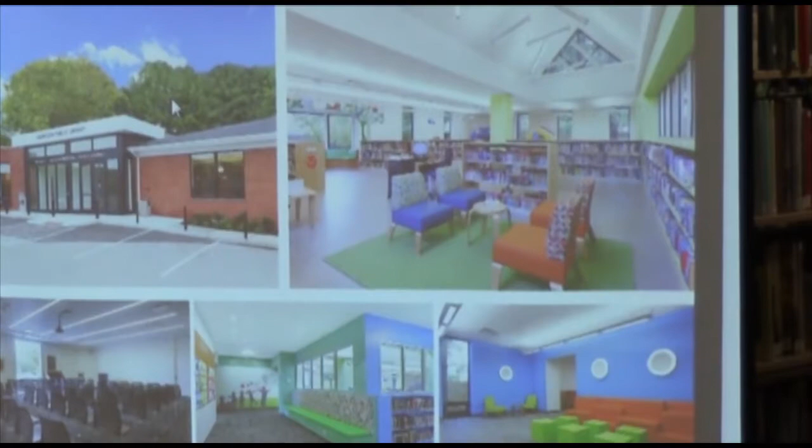We've also modernized and created connections from older buildings to newer buildings, both at the West Point campus, at the city of New Haven next to Yale, and we're also doing two Carnegie libraries in the borough of Brooklyn in New York.

At Vassar, the Ingram Library, which is the addition on the right, connected two wings of the main academic library to create a new focal point and entrance. And we combined both the old and the new to provide a purpose-built facility for library study at Vassar.

And lastly, we've done quite a few civic libraries around the nation. We've done work at the Portland Multnomah County Library, the Cleveland Public Library, the Los Angeles Central Library, that renovation back in the late 80s. This is a project we did in Savannah, Georgia.

All of these projects have received awards from the national organizations, the American Library Association and the American Institute of Architects. We understand how important these libraries are to the culture and the fabric of the community. We want to make sure that anything we do here in South Orange has lasting value in a civic sense for the entire community.

So let me mention a couple of notes about your existing buildings here. The current library here, as we all know, is in the 1968 building, which was a little scary when I thought about it, because that's when I was born. Now, people, we improve with character and age, I think. Sometimes buildings get a little worn and tired, and they do need rejuvenation and maintenance. The 68 building has served you quite well in this amount of time.

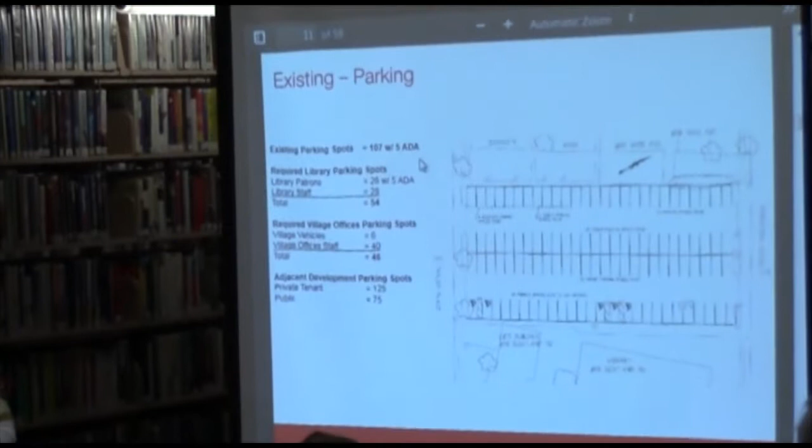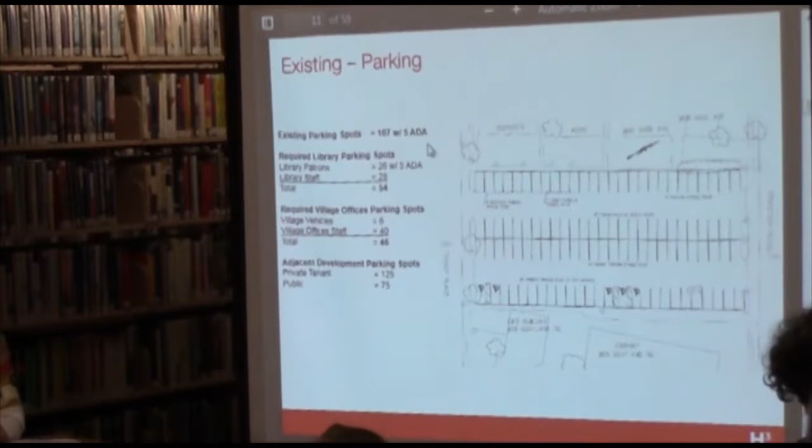Let alone all the cars that were coming in, trying to get in either on Comstock or Taylor. And I already know, it was one of the very first things early on, the traffic coming on Scotland, the speeds of people coming down that county road, trying to get all these cars into this space is a very difficult thing. So the parking issue was one of the key drivers as to really considering reducing the program to just the library.

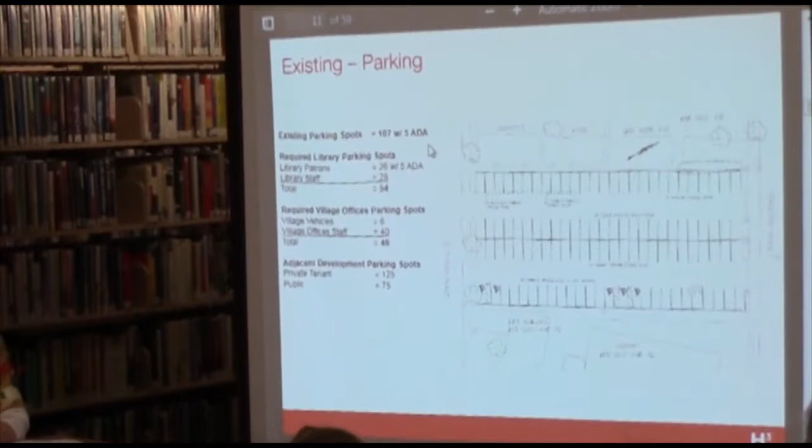So the next issue was, how do we connect the Connect with the 1968 building. The Connect, obviously being empty now with that tenant leaving, owned by the village, is a perfect way to retie back into the history of the neighborhood, the Montrose Park Historic District, as well as a space that could be used for library purposes. Derry will get into why we think the square footage of the Connect, if it were connected to the 1968 building, seemed to be the most logical and sort of a win-win in terms of trying to put together a plan.

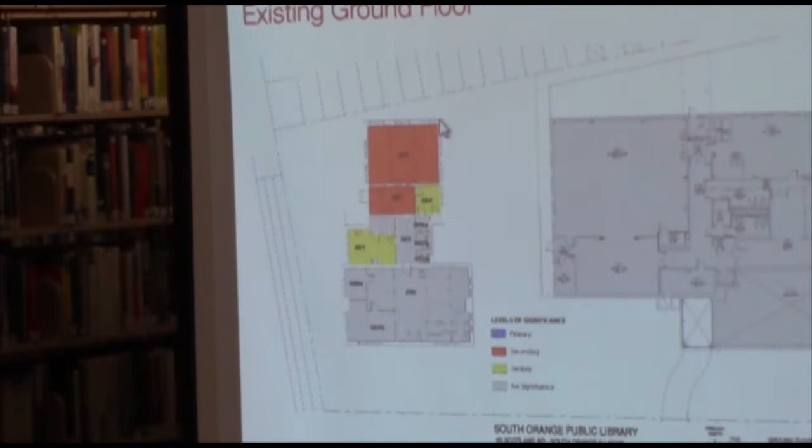So let me just go through quickly the existing plans in the building, if I can see if this works. So we have here the Connett building. Here's Scotland Road on the bottom. Here's the parking lot on the top. Here's the building that we're in, and we're looking at right now the lower level. So this is the level right now. You come in from the parking lot to the back. Here's the children's space. Here's the meeting room that's downstairs. And then there is library back of house facilities in the northwest corner, or northeast corner.

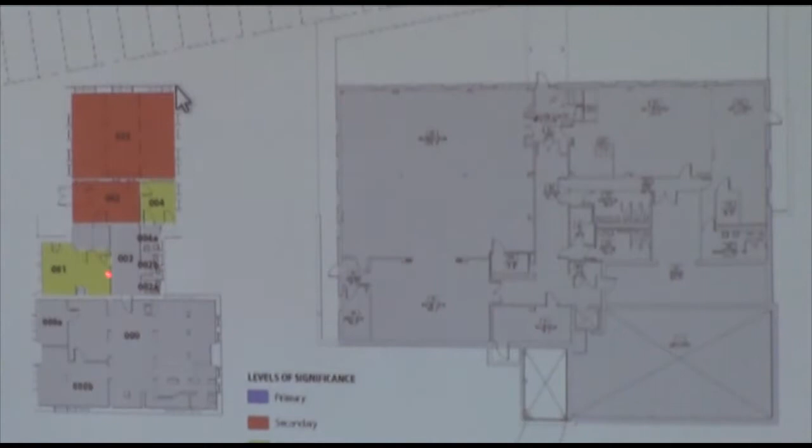In the Connett building, they're mostly in the front, underneath. This is below grade. Scotland is here, it's a level up. This is all below grade. This used to be the cellar, the boiler rooms, and a lot of mechanical spaces for the Connett building. And there are a couple of spaces back here that could be repurposed for office space as well as back of house library space. Can we go next?

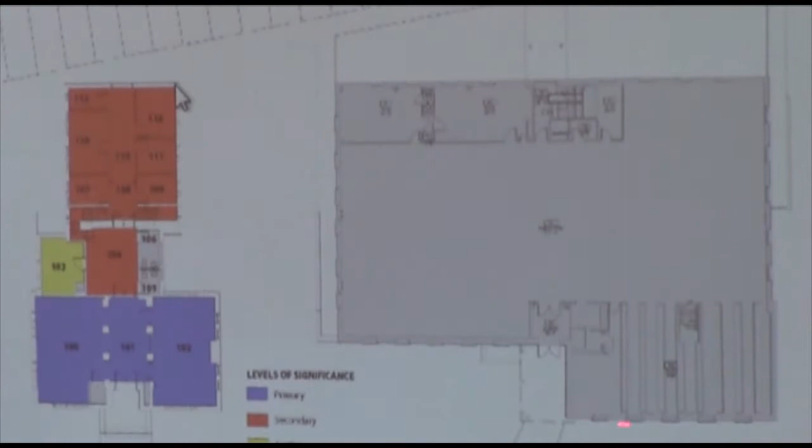It has ceilings that are around 7 feet tall. I'm not really sure why anyone wanted to do that, and there's really this weird 1970s basement wall paneling all over the place. But if you clean that all up, this would make a fantastic meeting room in the back because it has the height, it has the space for it. We're sitting right here in this corner. And Melissa's office, library offices here, and the big open room that we're in right now, and then the stacks here. Go to the next.

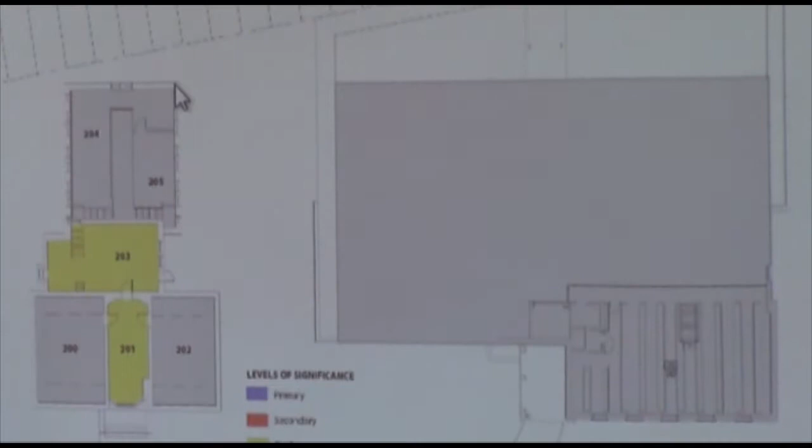And then in the 1968 building, the sort of mezzanine level, which is up here, is the only other portion of this building that has access to an upper level. In the Connett building, most of these are attic spaces, so they have the big triangular roof areas. These used to have these beautiful lay lights or skylights that would bring light down into the reading rooms below. And there's some strange kind of attic spaces here that you could repurpose as offices, but unfortunately there is no elevator access there. You would have to get a lift or handicapped accessibility up to those levels in order to make them accessible. So that's sort of the general lay of the land.

I'm going to hand it over now to Darian to talk through the big picture.

So it's really delightful actually to be in this room because this verifies and reinforces all the great qualities about your library. And I've done a lot of library design in my career, but just being able to sit here and see the flexibility of the space, you don't really appreciate this when I'm having conversations with Melissa. Oh, I just clear all the tables away and put chairs in, and that's where we do our big programming. To actually see this, working with this is great. And also, too, to sit here and have this vantage point and know that from the circulation desk, you can see, you have visual control over the entire library space. So you have many, many qualities in your library that many people hope to design into their new libraries.

So we hope to replicate all these, but we hope to actually make it better. Because it is a little, just looking around at the finishes and some of the furniture, it could be updated, it could be made to be a lot better.

And also the expansion would help you make a connection between the Connett building and this building. When we did the evaluation, we'd been brainstorming about this for over a year. We wanted to see how to update the Connett building, to join them into this wonderful assembly of spaces with the Link building.

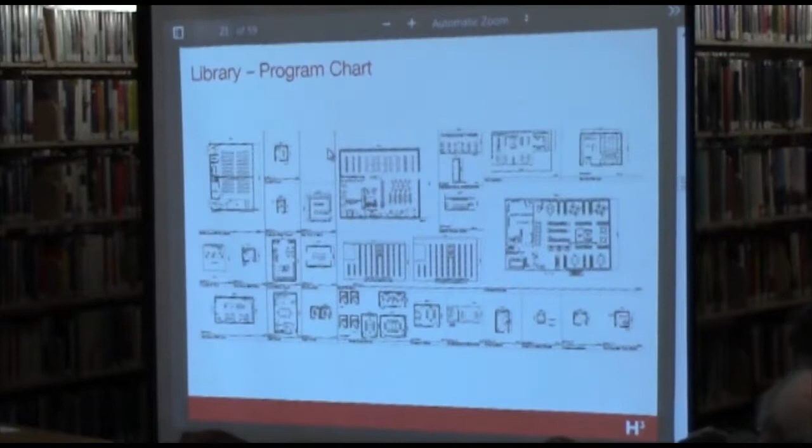And this is how we actually go about programming. We sit with the library staff. We have a series of questions. We ask them about the activities and the quantities of the materials and the number of people and the times of day that you use your library.

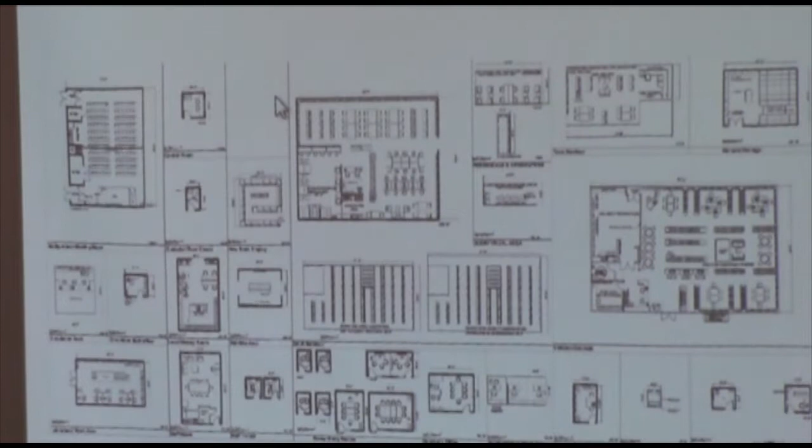And we sketch. Architects are very visual people, so we like to put together little sketches, and this defines what goes into each one of the spaces. This then becomes a little booklet, and we complement it with a data sheet that tells you everything that goes into the building or into the space, via power outlets and data outlets and what type of light fixtures would best be in there and the sort of finishes.

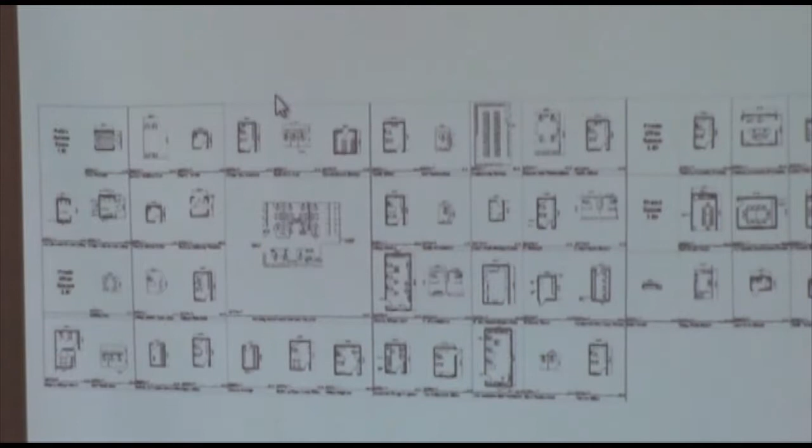So that's when we say programming, that's what we mean is building programming, and we make these sort of charts. We did the same exercise too with the village hall, and these are all their parts and pieces, but they're going to have to go find someplace else to be, or stay where they are, which is they have a nice office space over there, so that's probably the ideal there. So these are the ideals.

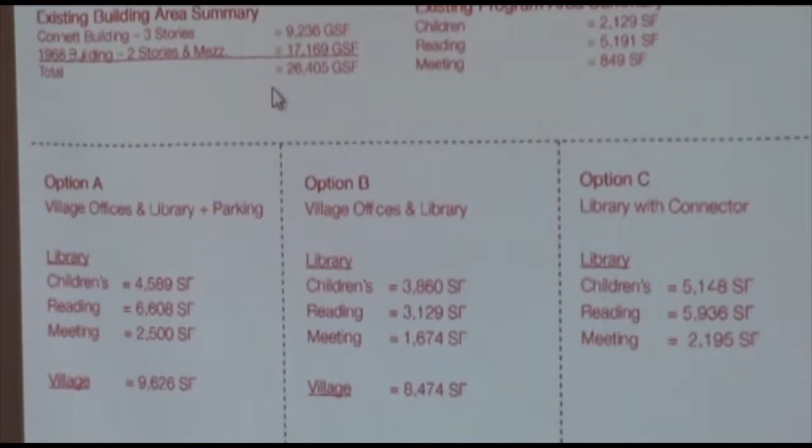So if we look at the program in summary, we have the Connett building, which provides about 9,000 square feet of space. It is most useful for meeting rooms, for some reading rooms, and for staff areas. And then we have the 1968 building, which is most useful for the children's department and the adult department on different floors probably, and then some of the other sort of small meeting rooms that are very desirable now.

A lot of library collaboration takes place these days, where you have people coming together to either do book clubs or some other sort of small meetings, or they're working on, if their students are working on papers together. And so it's very helpful to have a series of smaller meeting rooms.

And we understand too from talking to the village and to the library that what South Orange really misses, or is delinquent on, is places for meetings. You have a new community center that's under renovations too, but still, this is really, we need these rooms and these types of spaces in the library.

The greatest increases in our program, actually our recommendations, are for the children's department. Currently, it's only about 2,000 square feet of space, and we're suggesting that we double it, a little bit more actually, to 4,500 square feet, so the children can have their own program room, their own place to be messy, and their own place to have a much more expanded collection, and a lot more stroller parking too.

So all good things. And then the remainder of the library is redistributed through the available space, and there will be staff offices, a few over here, but for the most part, we're going to move them over into the Connett building.

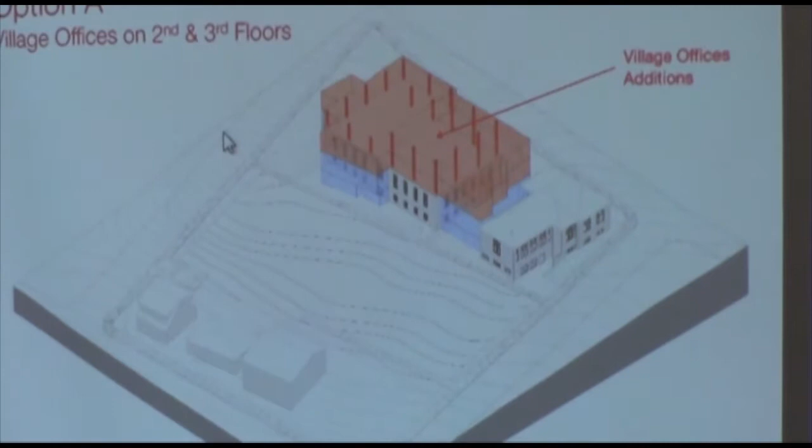So option A was the one we talked about earlier, where we really had the library on the ground floor and the first floor, and then on top of it we were stacking the village offices. And what starts to happen is you start to realize you really lose the character of the 1968 building. It starts to engulf the building.

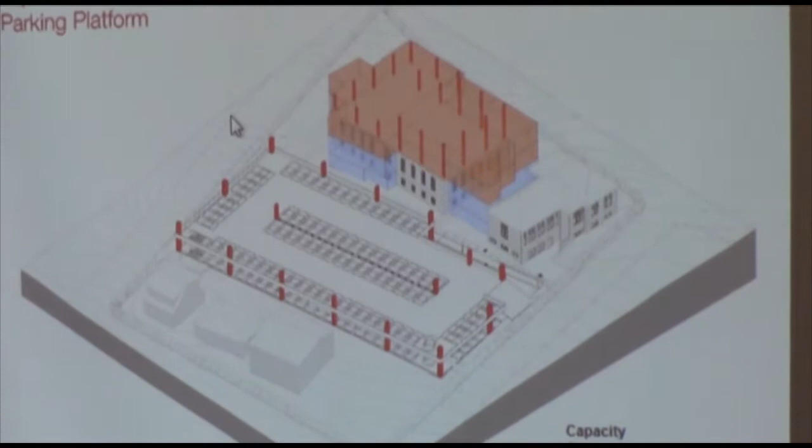And then another thing we looked at was the parking, as Daria and John had described. We looked at it a couple different ways. First was a platform, which provides 160 spots. The problem with that is you're only gaining 60 spots, and the cost of doing this is $3 to $4 million. So that kind of ruled that one out.

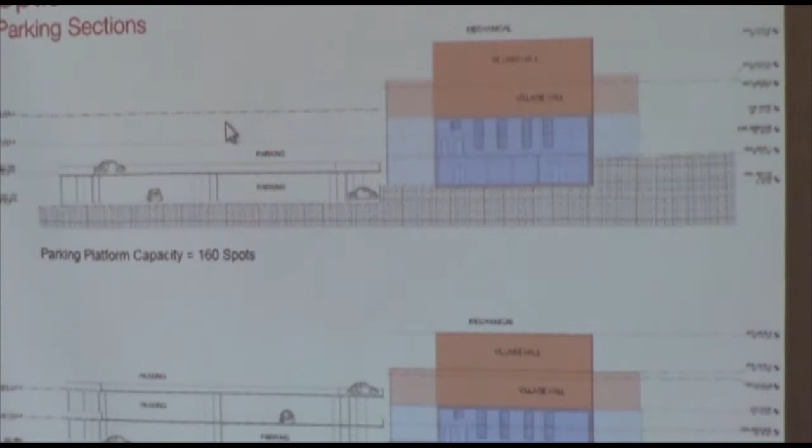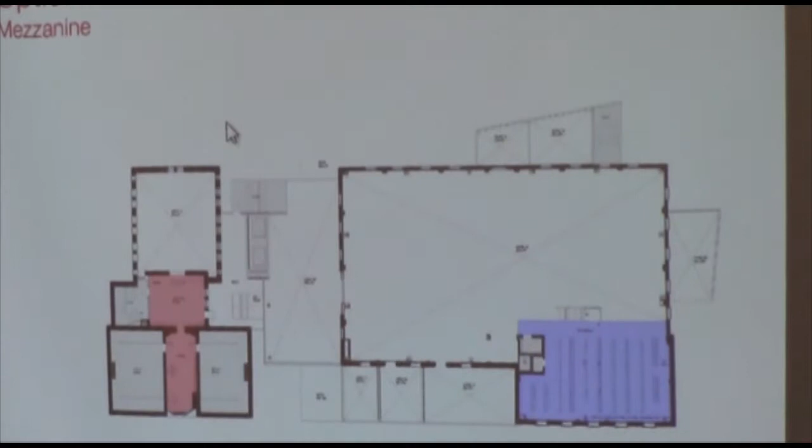The mezzanine is really just the book stacks you see up above, and a staff area in the connector. The village offices were really the second and third floor, everything you see there. That would have been all new construction.

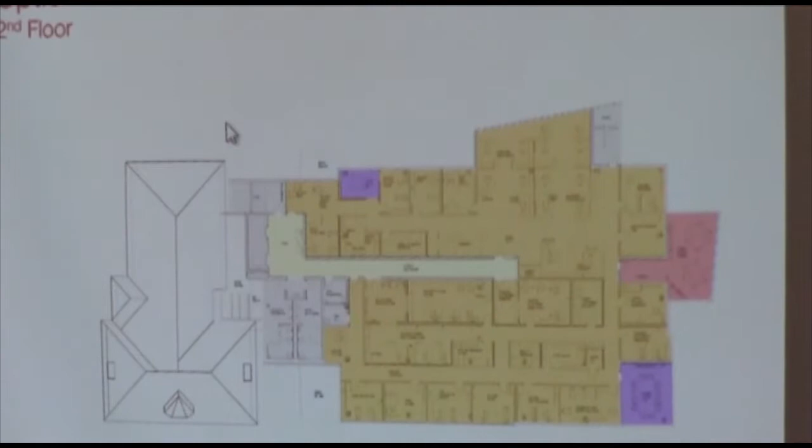Part of the challenge with this was you have to create new structure through your existing structure to build up, which increases the cost significantly, and it was a little bit out of context and scale.

So option B was really looking at trying to scale down and find places where we could share function between the village and the library, like meeting rooms that could be shared, restrooms, and pantry spaces.

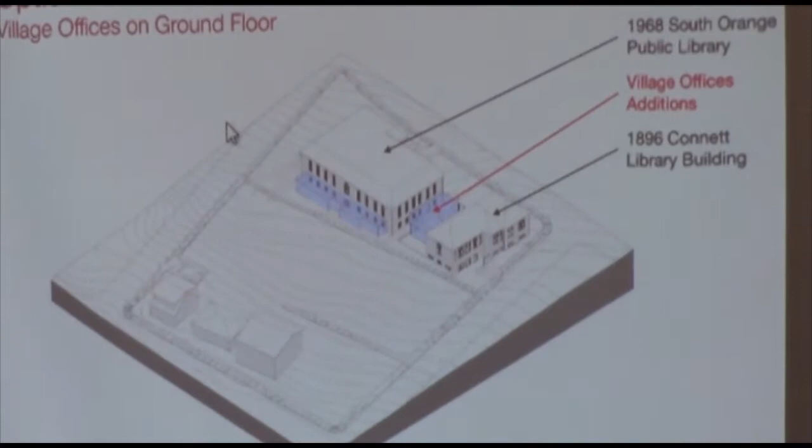Essentially what you end up doing is condensing the village offices to the first floor, and the library to the ground floor and the first floor.

One of the issues we found with this scheme is that it creates a scattered program, so the adult areas are not consolidated. It's a little patchwork-like, which is a bit inefficient.

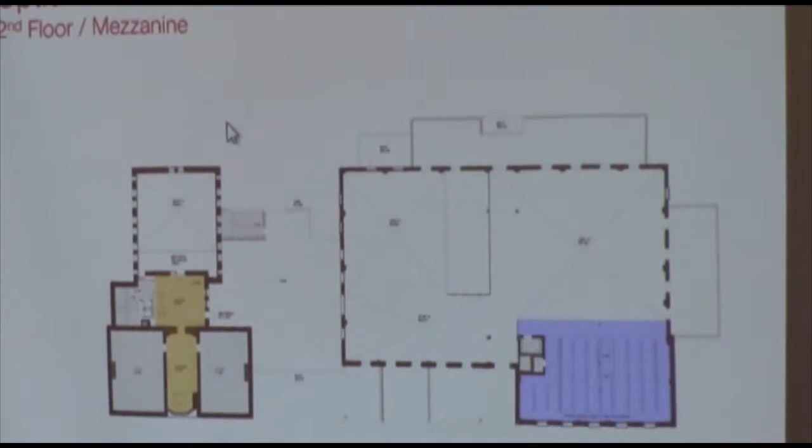And then finally, the third option is the library-only option. Can I just say that this is the option that the village has agreed to, the option that Nathan's going over now, the library only.

It's a more modest option where we really retain the character of the Connett and the 1968 building, and just do a more simple link between these two buildings to make them work.

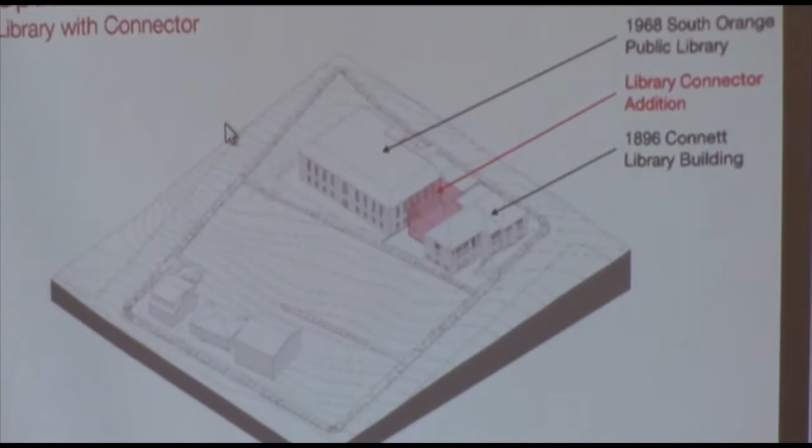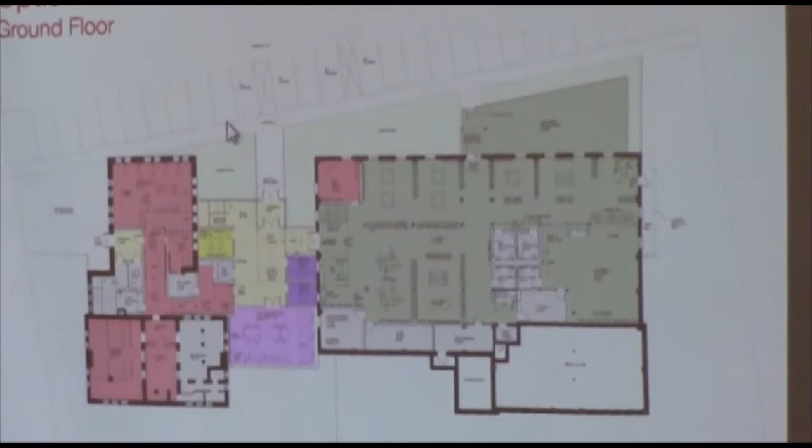The new connector becomes the main entrance from the parking lot side. Off of that, you have an accessible elevator that can take you up to the ground floor. You have an eat and work area in pink, and a couple of smaller meeting rooms for 2 to 3 people, and a friends space that could also function as an additional meeting room.

Another thing we were trying to do here is create a double height space, so a portion of this lobby is open to the lobby above. Off to the 1968 building, you have the children's area.

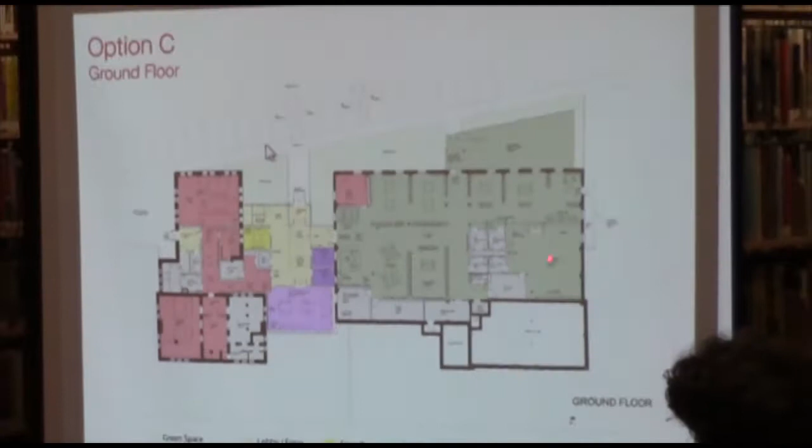We've done a couple things: the services remain off of Scotland, embedded to the ground, and you have a nice big new program room. We're trying to reuse all of the plumbing from the current restroom location, but renovate it into 4 family restrooms, which was a huge request we had, making it more useful restrooms for the children's area.

Off of that, we also have an outdoor space directly adjacent to children's. We were looking at a fenced-in area that would be protected as well, so it's not open to the parking lot.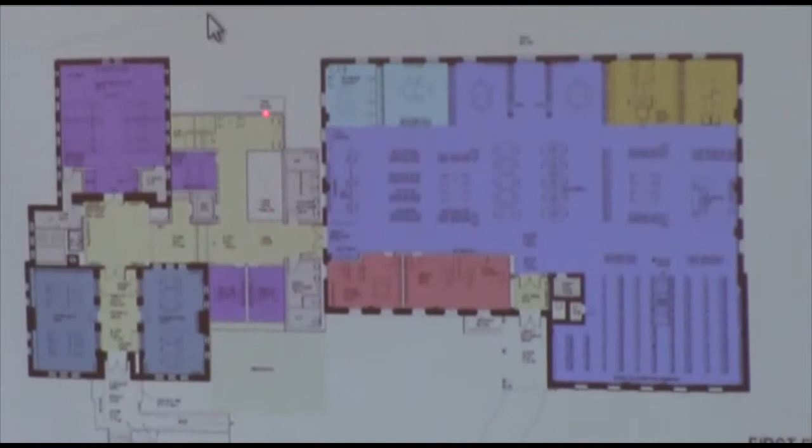Moving up to the first floor, you start to see the open area to below, the lobby space. We have more meeting rooms for 6 to 8 people, restrooms between the 68 building and the new connector, and then the large meeting room that John was describing.

If we take out the existing floor plate, it's a really nice gable—it's a double height space, and this would accommodate about 75 people.

So you'd be able to do some of your village after hours meetings as well. Security-wise, you can basically close off the library from the Connett portion of the project, so any after hours events could happen there.

We've maintained the reading rooms. Another thing we've added is an accessible entry from the Scotland side through the Connett. We're still maintaining the entrance off the 68 building, but this provides another accessible entrance from Scotland.

Moving into the space we're in right now, it's a really open, flexible space, much like you have now. We're showing the teen area anchoring one corner, local history anchoring another corner, and the library director and staff in the red there.

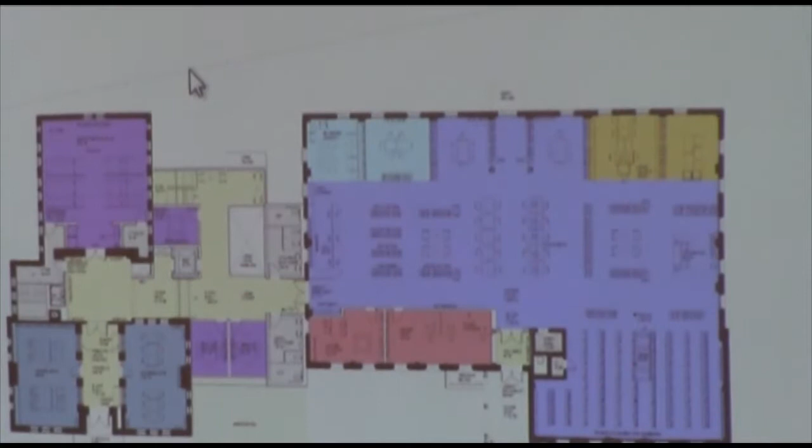The stacks remain where they are, and you basically have the circ desk on one side and the reference desk on the other, so there's a good sight line to capture the whole room in terms of surveillance.

On the upper second floor of the Connett and the mezzanine, the Connett would basically be a staff area. It's also your access to the roof. There's additional staff area here, which ends up acting as the pantry for the staff lounge.

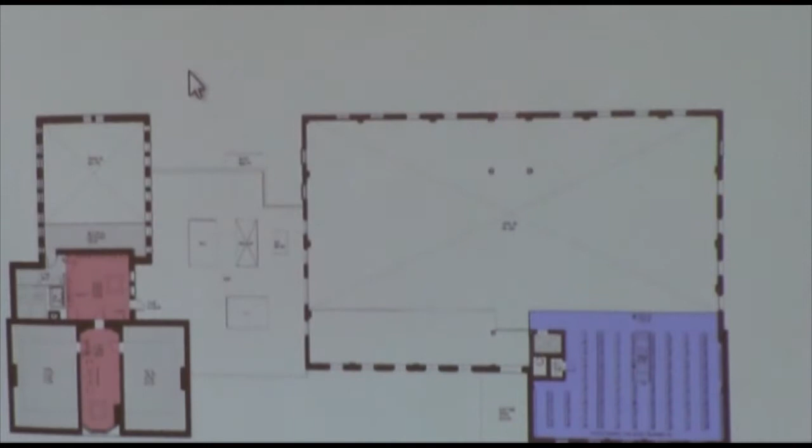In terms of budget and funding, for option C the total cost is $12.54 million, or $409 per square foot. We've also looked at this in phases: phase 1 is the Connett and the new connector piece, and because of the historic nature of the Connett, it's a little more expensive to renovate, with a bit more unknowns, so that's $7 million. Phase 2 is renovating the 68 building we're in now, and that's $5.54 million.

There's a few add alternates we've looked at. The accessible entryway from the Scotland side through the Connett was $42,000. For the 68 building, there are a few items that don't need to be replaced today but are getting close to the end of their life—currently the rooftop units, the roof itself, and the windows, which are from 1968. In terms of building the most efficient envelope, those are all things that could be upgraded.

For reference, another library project happening simultaneously in the neighboring town of Maplewood puts in context the cost per square foot they're looking at—$554. It's a pretty significant renovation, more along the lines of our option A. So this breaks up all three options.

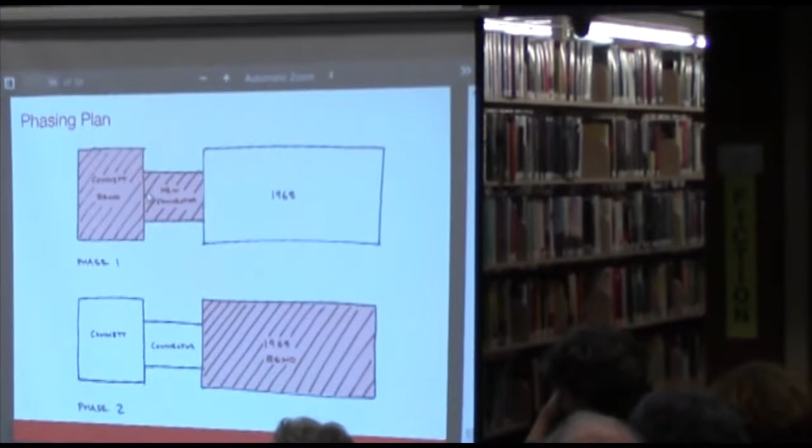In terms of phasing, this is a quick diagram showing how phase 1 would work. Essentially, the 68 building could stay open as a library while this project is going on, and then you could move into the Connett and the connector while phase 2 is going on.

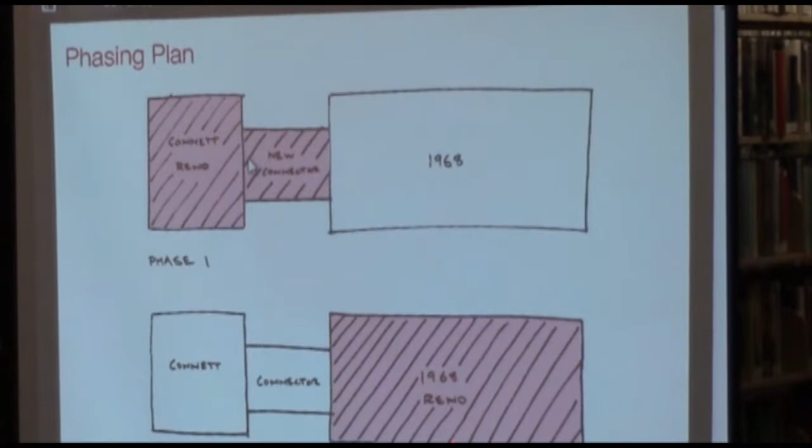Finally, escalation is always important to think about. Right now these costs were based on starting the project in January of 2021, so that's about a year of design time between now and 2021. As those move further back, costs tend to increase.

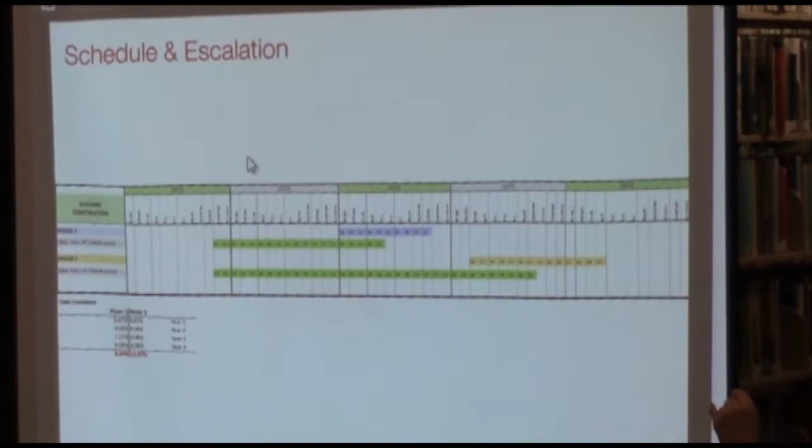And then just looking at grant and fundraising opportunities—I don't know if Jerry, if you want to talk about this at all?

So the question is, where does the money come from? As I noted before, there is the New Jersey Library Construction Bond Act. It passed in 2017, and in drips and drabs we've been receiving information about it, so we do know what the draft rules of the game are.

When the rules were issued in July, there was a 60-day question period where people could submit questions. Right now the questions are under review, and the final act will soon be issued, so we'll know all the requirements for actually applying for the funding.

So that is one way to get some of the money for the project, through this bond act. Fortunately, they will fund up to half your project, but there's some evaluation as to what is actually going to be funded and how much per square foot they will fund.

You can also do a library campaign. We know that other municipalities have gone out to the public and done fundraising. This may require hiring a professional fundraising consultant to advise you on where to go, who to seek funds from, which corporations are the best givers, and what kind of grants are available. Through corporate grants and other foundations, you can probably raise some money that way.

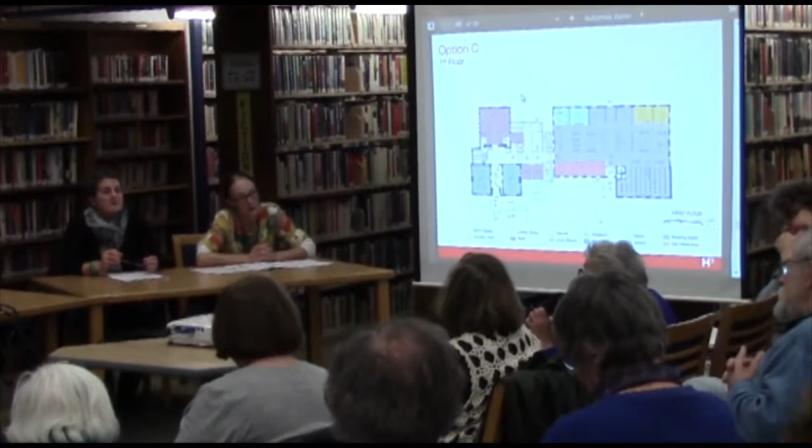I know I came in late, so my concern is: are we talking about a library, or a library plus offices for this community? I didn't hear the beginning, but I've read about offices in between the library shelves, and I'm completely opposed to making the library part of our office building, with office people who get elected and changed every year and don't have a library philosophy one bit.

I will say that the village trustees agree with you. After we showed them two schemes, Scheme A and Scheme B, they realized the amount of money that would be used to build offices on top of the library would be money not well spent - mainly because of everything that would have to go with it. They wouldn't have all the space they needed, and the parking required for all their use would essentially build a 4-story parking garage in your parking lot. So with agreement from the village trustees, we've come back with a library-only plan.

Well, I'm glad to hear that, because nothing the village trustees does these days seems to be for the benefit of the people of the community. And so - okay, I shouldn't talk about that.

Other questions, comments?

I'm wondering how much research has been done into the future of libraries. We're at a technological point - are you thinking of expanding the books actually in the collection? Is that part of the budget, and what would that impact be? What are we going to be doing in 50 years in the library? I've been a card-carrying member of the American Library Association for probably the past 25 years, because that's a lot of what my practice has been on.

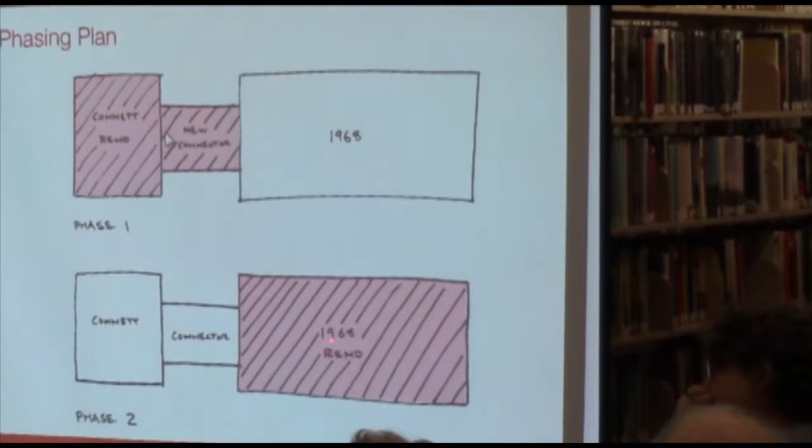That's assuming we stayed on track. And then there's a 4-month gap in between, and that would be the period when you would move into the new section of the connector, while phase 2 would start for the 1968 building. That's a little bit longer, about 10 months to a year. So about 2.5 years?

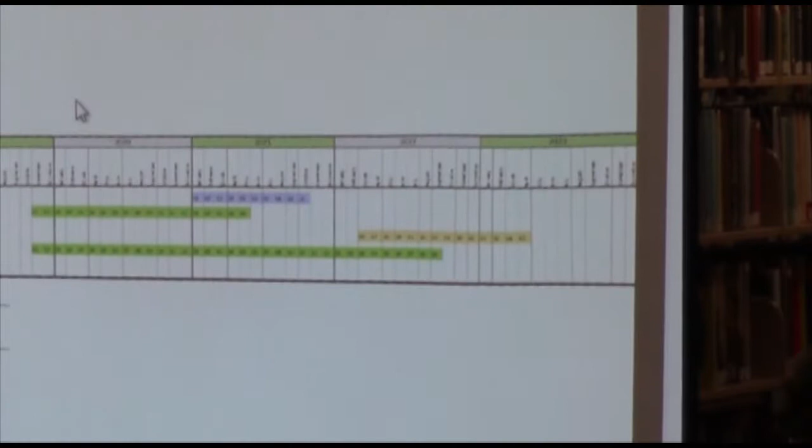Wait, before we move on, can I just say something? I want to be really clear that this is ideal. The village has voted in principle to move forward with this library-only plan, but there isn't a commitment of funding at this point, and there could likely be a large gap between the two phases, depending on what happens with funding. But the idea is that the 68 building will remain active as long as possible.

The idea about phasing it is that, frankly, you have the ideal situation here. You have a 10,000 square foot building that's not being used right next door. Maplewood has to basically shut down its library to build a second floor on top to get their facility up and running. So this can stay exactly as it is until that comes on board, and then move over for maybe a year while this is being renovated, then move back.

Sounds like the best of both worlds. The design is set up so phase one could happen and this could stay the way it is. There'll be connections to the new link until phase two happens.

Totally promised I was coming back. That's number two. I have a really quick question I think you can answer quickly, and then a more extensive question. The first one is, I'm confused about the parking.

So you said there are 170 parking spaces available, but no, 107. 107 parking spaces available out there, but only this first row is for the library. So does this mean that all of the residential or other business parking is now converting to library parking?

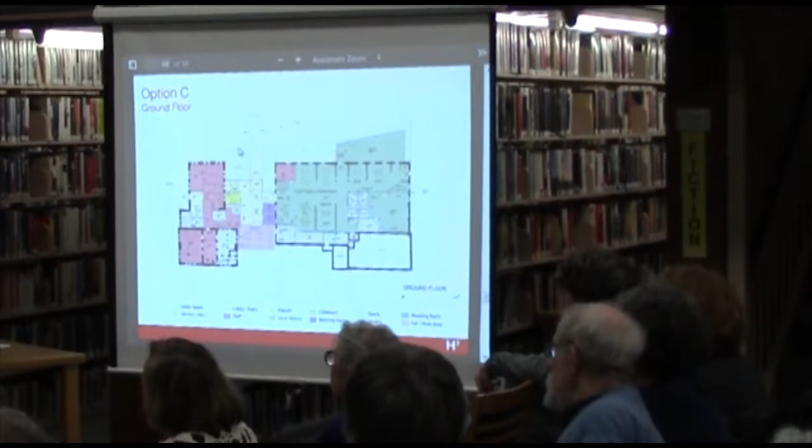These are things we won't totally know until we get into schematic design, when more consultants for mechanical, electrical, and plumbing are involved. Because the building is increasing in size, and currently this is not a sprinkler building, these are all life safety things we have to add. So the gas and water meter room is already showing a larger room, electrical rooms will get a little bit larger, and some of those gray spaces, where the furnace currently is, will increase. We've anticipated some space to allocate for that, but as we continue forward we'll understand the space requirements better.

In terms of your second question, are we losing that conference room? Yeah, basically you're losing it, but you're getting a new program room here which is actually larger. That is currently staff area, so the children's department is taking up the entire ground floor.

You're talking about the staff area that's shut back behind the bathrooms? Yeah, that expands. So the children's room now, the meeting room is right about there, and the children's area is essentially from this line, where those doors enter, it's basically this space right here. Wow, so you're more than doubling the size of the children's area.

We need it. And then there will be some kind of glass doors that go out into that fenced-in garden area. That's the main entrance you have right now, and we'd probably be redoing the door. This wouldn't necessarily be an entrance to the building anymore, it would probably be secured depending on how the library wants to operate that. Essentially, the main entrance would come through the connector, with the circ desk right here and the additional children's staff nearby, so you get good surveillance.

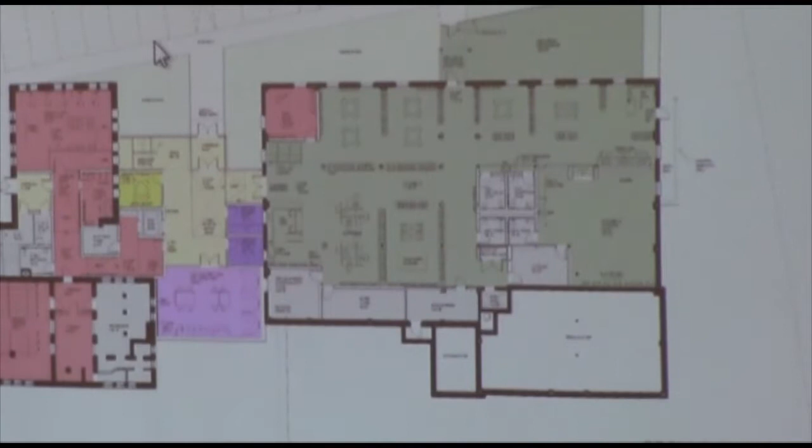I'm very interested in the elevators, I'd like to see where on the ground floor there is an elevator. So the elevator is right here, in the connector, it's right here. Okay, so this is part of the new construction as part of the connector. This is the new elevator, which is right off of the lobby.

Then what happens is, on the connector part, because the floor of the connector is different than the floor plate of the '68 building, there's actually a set of stairs here. So you can come out to the '68 building on this level from the elevator, or you can come up on the upper level for the connector building, so it's doing double duty to make it fully accessible. The elevator goes from the ground floor to the first floor, and then it goes slightly up to the connector first floor, about 3 feet, it's not a full floor.

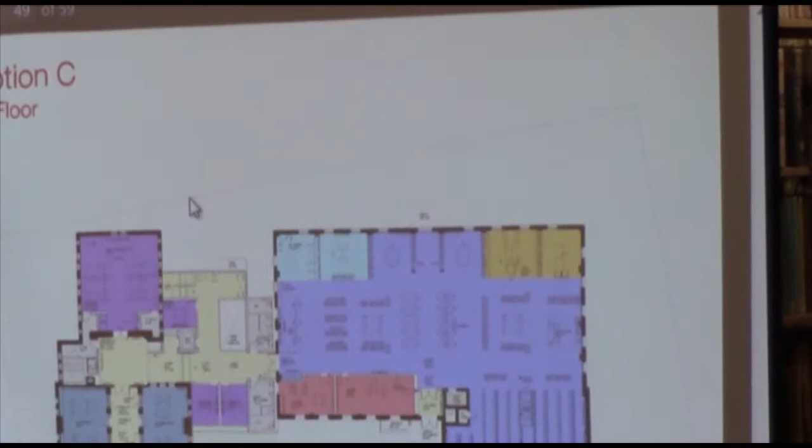Okay, so on that, in the Connett part, there's supposed to be places for staff and offices, is that right? It's in the Connett part. Okay, so if you had somebody on your staff who broke their leg, would they be able to go up to the staff parts of the building?

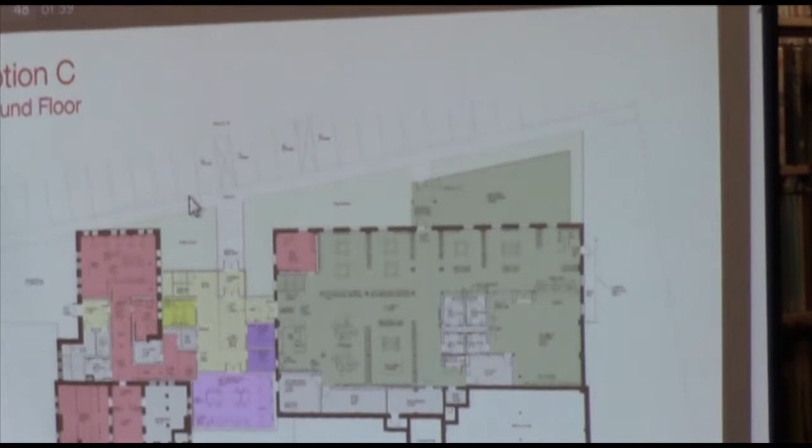Yes, yeah, so in the Connett, it is a very complicated existing layout, but we have a series of ramps, because this lower area that used to be originally the children's area, there's a set of ramps for that portion. There's also a little bit of ramping to connect to the connector. These are all based on existing conditions, and then there's a third we talked about. So on the first floor, there's currently no connection up to this mezzanine, second floor of the Connett.

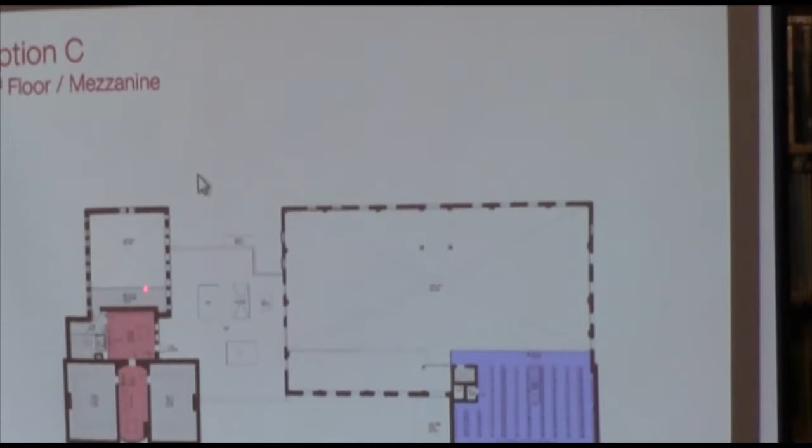So we're actually adding a platform lift up there that allows you to get up to the pantry lounge for the staff in this additional area. And then this could also serve as a technical mezzanine if they're doing filming or live streaming for any village functions in the meeting room below.

So a platform lift - people, yes, it does. Okay, because this building has to be accessible to everyone. And actually, there's some value in terms of funding. There are specific accessibility grants through New Jersey State that we will be looking at. The library has already scoured all the different funding availabilities.

You get some money if you redo this elevator. We can find a grant to do a ramp to the front of the Kinnett building, a different pot of money. So we are looking for ways to maximize the value for these basic grants.

The town has an aging population. There are people who have never been up there because they can't make the stairs, and they don't realize that if they got a librarian, that librarian could take them up on the elevator. It's got to be smoother. It's got to be - you know, it's a civil rights issue. We want to make sure that everybody can get anywhere in the complex.

Additional questions or comments? I know this isn't the architect.

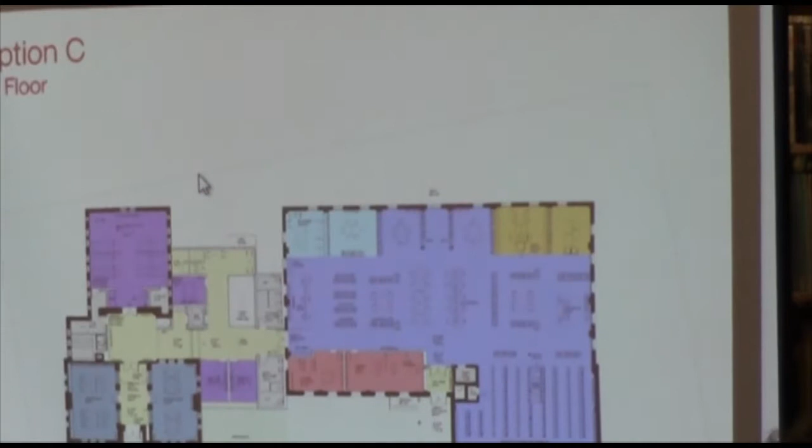My neighbors - it's just, this thing about parking to me just doesn't seem like, oh, we'll fix it later. I mean, so many times you drive by and you can't get a space, and I just end up coming back at night. I live - in good weather I can walk, but I don't really want to walk to just return something. Anyway, I just think it has to be a thing because it's why people just don't come, like even for the movies and stuff like that, you're gonna get a ticket.

And Maplewood, I know, has free parking. I don't know if they're gonna continue with that. They have 10 spaces, very little parking, but if your town has like 4 hours of street parking... but here, if you have to worry about 2 hours and you gotta pay, it's kinda like, build it and they'll come, you think.

I'm sorry, I didn't know. Thank you.

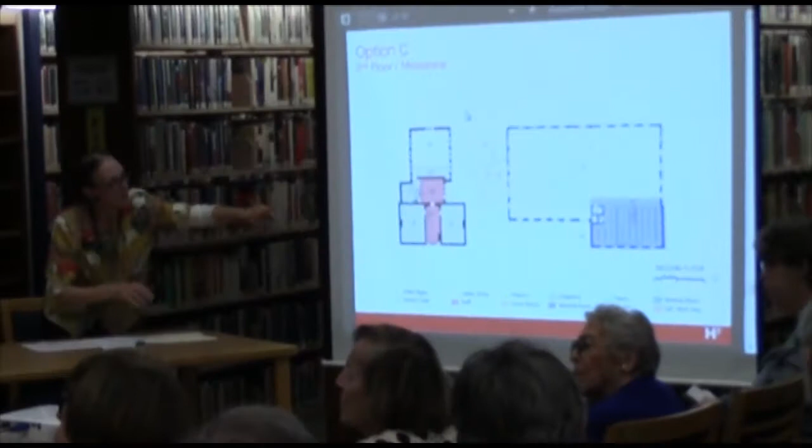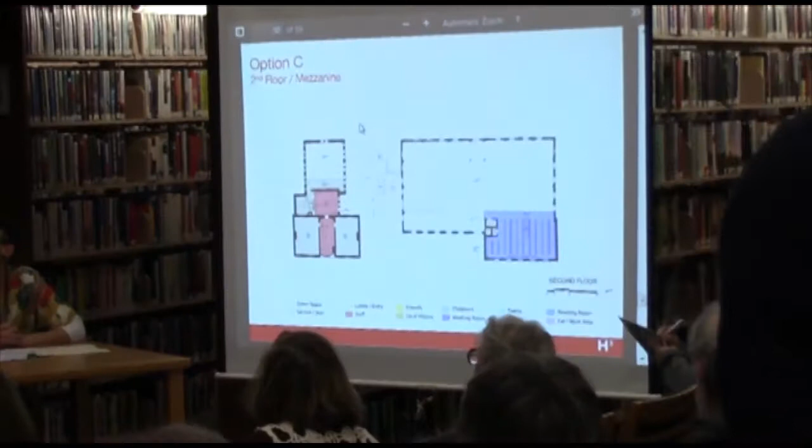The platform is like what they have at the bank on Valley Street, the BCB. There's a little platform lift, a little set of stairs where it looks like a little box, and you would put either a wheelchair in there or a person would stand in there, and it would move up.

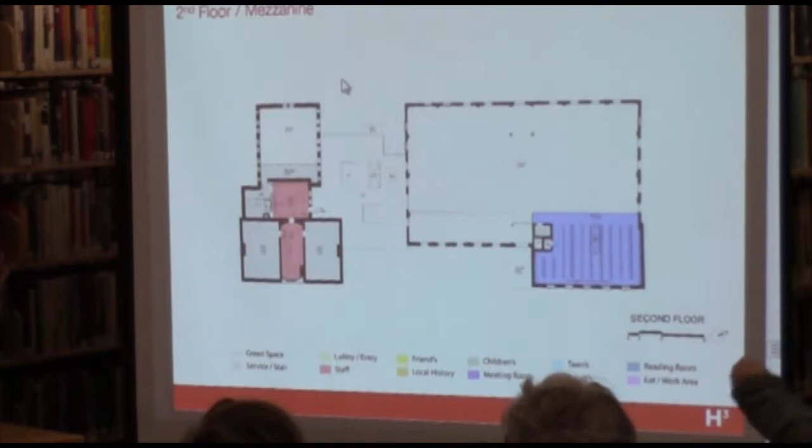So it's not actually moving to the full floor. It's not a full elevator because it's only going up 3 feet, and it's open to the room. Anyone who gets in, you're not enclosed in a space. It's just a lift that goes up 3 feet from one level to another. And that is for staff, so it's not going to get heavy usage because we're not anticipating that the staff is going to grow in number.

This one would be enclosed, but it's not like a full-scale elevator. They just basically build walls around what Hildy was describing. But like we've said, it's not getting public use, it's getting staff use.

Additional questions or comments?

So as far as advocating or helping to advocate for the New Jersey Library Construction Bond Act, what can we do to help that process? Is a letter writing campaign something that helps? What's something that we civilians can do to kind of up our chances there?

Well, I think it comes down to, we'll be working closely with library staff and the working group to put together the application. One of the things, to be quite honest, is a strong sense of fundraising on your own part to make sure there is buy-in from the local community. That it's not just dependent on the village trustees and the state, that money for furniture and equipment comes from your own fundraising, because we want to make sure it's broadly supported, and proof of that is a strong capital campaign.

Another thing is a lot of people started to come out of the woodwork once it got moving, so there were donors at all different levels. The main one that Daria talked about was a big one, $1 million. There were a lot of smaller donations for smaller features, like the millwork for the trees on the walls of the children's area, and a dollhouse-like structure that was donated. They also did a brick campaign where it's $100 a brick, which becomes part of the paving for the new library. So that's a smaller way to contribute.